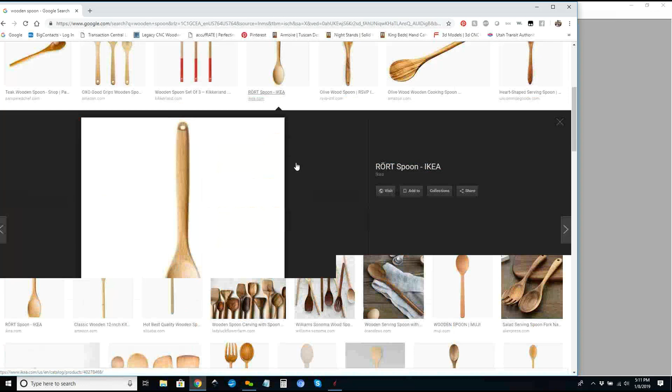Okay, I'm going to minimize this out of the way. So I've been asked to do some work with some spoons, and we are going to first pick the style of spoon we want. You can get on Etsy, Pinterest, Google, wherever, and really look up - there are a lot of different kinds of spoons. So it really depends upon what you're after and how we're going to create it. We're going to use this one from IKEA, just kind of a generic, nice-looking spoon. We're going to use that kind of as our guideline, but use that term pretty loosely, so we can play with it and decide what we want to change about it.

So we're going to open up our Aspire. This is the newest version, Aspire 9.5, and we'll create a new file. We're going to do a double-sided part. We're going to make our part about 18 inches long, about 2 inches in width, and then our Z we're going to just leave at 3/4.

The reason we're going to leave it at 3/4 is we want to keep it to where it's just a nice, even, easy to get material. Now you can make your spoons into ladles by making your Z thicker and doing the exact same thing we're going to do, just with a thicker piece of material.

Now, in the two-sided job setup, you have this zero position right here, and this is where you kind of have to decide what you want to do and what you're comfortable with. I'm going to leave both of my Z's on the top, so it's going to be material surface for both of them - on side 1 it'll be on top, and on side 2 it'll be on top. You can go machine bed, or you can also go on top with zero off the same side, which means on the top on the first side, bottom on the second. You can do that however you want.

For me, I'm going to do this where it's all off the top. Okay, and then our XY datum position, I prefer mine in the middle when I'm doing two-sided work, and you'll see why when we do our flip. Your flip direction, this is another personal preference thing. I like to flip my short edge, so in this case I'm going to flip it from bottom to top or top to bottom, versus from left to right - that's just because that's going to be the smaller edge to flip of the two pieces. Doesn't matter beyond that.

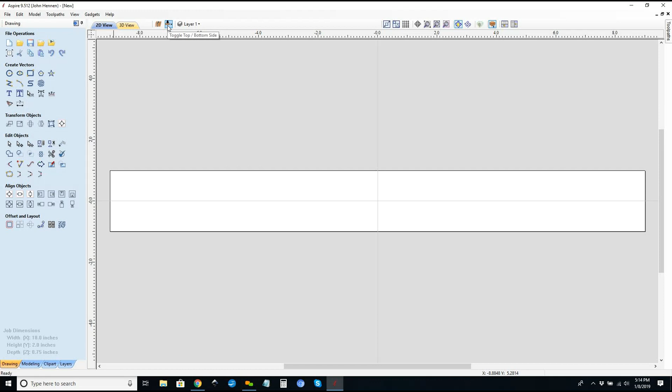Okay, so we're going to work on the top first, and we're going to leave this in our toggle view where we have our 2D up top and our 3D down at the bottom. That's because it's a really long, skinny piece - we can do that and still have a really nice design area.

So let's go ahead and leave it like that. Now you can draw this by the numbers, and that's what we're going to do tonight, or you can just lay it all out. So doing it by the numbers, I'm going to drag a guideline down on 0, and I'm going to bring this back to an even 7 inches here.

Then I grab my draw ellipse, and I'm just going to start an ellipse right here until it's about the size I want. And then I'm going to make this a little bit longer. I'm going to make this 2.5, and I'm going to make this one 1.5 and 1.5. There we go. That's going to be the size of the dish for my spoon.

Now, when you create these things, what we also need to think about a little bit is what is the backside and how thick the wall thickness of the spoon is going to be. So all that has to be thought of ahead of time when we're starting to build this.

So we know that this is 2 inches wide, and we have 1.5 inches here. So the thickest our wall thickness can be is 1/4, because that'll bring us right out to the edge of the material. Or we could shrink this in a little bit and make it maybe 1.25, and we can make it a little bit smaller.

So whatever you want to do with this, this really is where you start deciding and personalizing your spoon to make it however you want. So we'll leave it like this for now. So essentially it's 50% of the width equals the length.

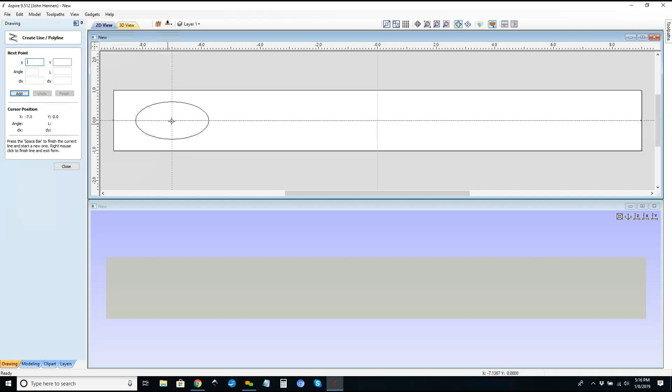Okay, so we're happy with that one, or at least we think we are for now. So we'll leave it like that. We're going to do our handle. So I'm going to just draw our polyline tool. I'm going to start right in the middle of the spoon. I'm going to bring this over and make it a 15-inch long spoon.

We're going to make it a relatively long spoon, and the reason I'm going to do that is because my wife and I do a lot of bottling. We love it, it's one of the funner things that we do together. And the hardest thing to find in stores is a really long-handled spoon. So we're going to make one.

And of course, you can make it whatever you want. You don't need necessarily to make it that long. But again, like Bob Ross always said, this is your happy little tree. We are making our happy little spoon. So do it however you want to.

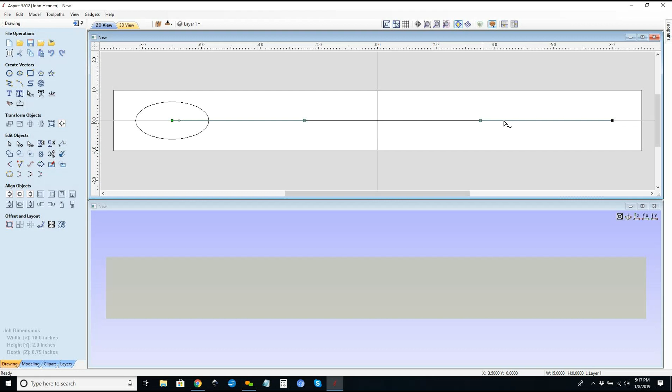We're going to select this center line here. We can go to our node mode. We're going to turn this into a Bezier, and we're going to start by just pulling this up. See, we're starting to create the shape of our handle here.

And I'm going to bring this point here right up to the top right there, and then I might pull it down and in. So we're going to kind of get a shape for a handle right there.

And we're going to take our ellipse, and we're going to do an offset on it because I do want to get an idea of where this handle should end, and it should end at the bottom side, not the top side of our piece. So I'm going to do an offset of about 1/8 of an inch. So our distance is going to go outwards 1/8 of an inch.

Okay, and I'm just going to grab this guy and move him up to the top of there. And then we're going to pull this back in so we have a nice kind of shape for our spoon. And this one I might use my arrow keys to bring it up a little bit more. It's totally up to you guys.

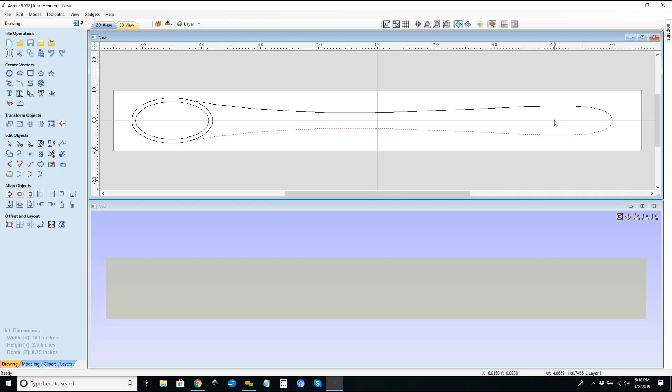Now, what we want to do when we look at this thing is we'll select our top vector. We're going to use our mirror objects. We're going to go to the bottom and just take a look at it and say, I kind of like it. I think that this is too wide. Okay, and I think that this is a little too wide. So Control Z to undo that.

Back to my node mode. I'm going to pull this one down into here, this area right there. Okay, maybe pull this back a little. And we'll bring this down just a little bit. And let's take a look at it again. Now, the other thing that we can do is if we like most of where we're at, we can insert another point right there.

And we can pull this one so it's a little bit more, that's a nice clean tangent line to it. So let's grab him. Let's do another bottom flip. You know, there's a spoon that I like a little bit better.

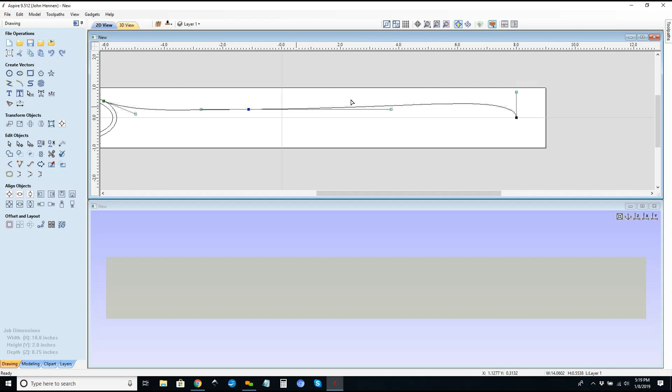I think this handle needs to shrink up just a little bit. So let's delete that, and we'll do this one more time. So to shrink it up, we're just going to grab this side, pull this over, and I might even drop this down one more time right there. Let's take a look at it one last time.

Again, this is your spoon. You're going to create this however you want to. But I think I'm pretty happy with the way that this is here. Maybe a little bit less on this area here. So we'll bring this down just a little bit more. In fact, we'll insert another point, and we'll just flatten that one out. Delete this, and take one more look at it here. There we go. Much happier with that shape.

So we're going to leave it like that. And that is a spoon. Class is over.

Really, that's the hard part, is just kind of getting the design right. Now it's the easy part, which is just creating your models and doing your work.

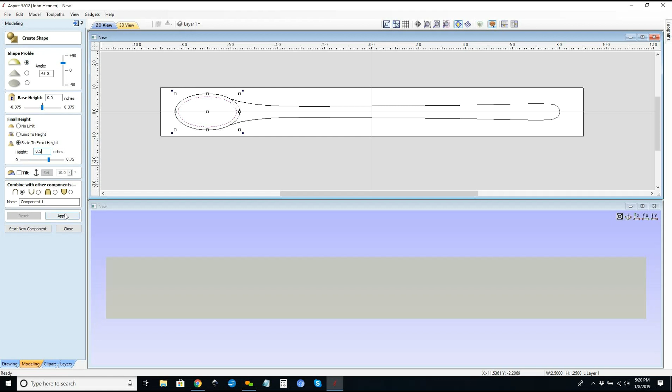So we're going to start by having the inner ellipse right there. We're going to go to our modeling, kick up here to our Create Shape from Vector Outlines, our Create Shape tool. And we are going to do a dome. We are going to scale it to a height, and I am going to scale this guy to 1/2 of an inch. Okay, we're going to go ahead and hit apply, and we're going to see it come into play right here. So there's going to be our spoon.

And then we're going to go to a subtract. We want that thing to go down into the material. It's going to look like that. Okay, close. For the back side of our spoon, we're going to do a little neat trick here.

We're going to grab this guy, so select our model. We're going to use the embossing tool, so that's going to be this create component by offsetting the visible model. Okay, we're going to offset the model, and we're going to do it a negative wall thickness. So I decided here when I offset this one, I was going to do 1/8 of an inch. So we're going to set it right there.

And we're going to preview that one, and it's going to take a minute to do that as it's bringing everything out. So we're in a dish, so a negative on a dish is actually going outwards. If it were a dome, an offset would be the other direction, it would be going in. But we want that dish and want it to offset outwards. So we're going to go ahead and let it offset out.

And I should have clipped the Z values. We may end up having to come back in and just clip that value real quick here. So when we're done with this preview, we always want to check that button that's going to clip it so that it doesn't go above the 0 plane, which is up on the top of the spoon at the moment. So when it's done thinking down here, we will go ahead and clip it.

Okay, so let's go ahead and do a clip preview, and then we'll be good to go. Then we'll go ahead and bring it on. Then we're going to flip it to the other side, put it on there, and you're going to see how the one is going to lay on the top of the other one, and we should have a nice clean piece in here, clean transition between the two pieces.

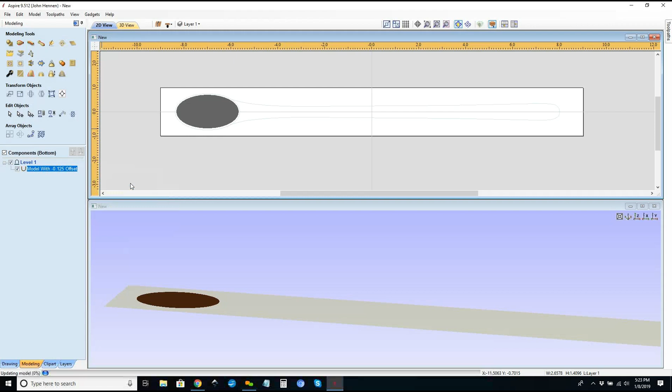Combine mode, let's do subtract on it. Here we go. And go back to our top and turn this beautiful bad boy back on. Wonder what's not doing here. This is what happens when you think you've got it nailed and you forget one quick thing. Let's do that one more time.

And turn off that clip. We can't clip the values because we're below 0, or we're clipping everything at the flat. Sorry about that. We need to just bring this thing in one more time without clipping the value to it. And then she should give us what we need.

Well, it's waiting. I just want to remind you to keep an eye on the screen. If somebody wants to be let into the room, you have to hit the allow button. Yeah, I've allowed, I think, 4 or 5 people now. Okay, good. So I think we've got them as they ping in. Oop, lost the glasses there. So.

It's almost here. Hey, while we're waiting, could you explain a little bit more about the offset model? Is that sort of like the vector offset, but applied to 3-dimensional models? That's exactly what it is. That's probably about the best explanation you can make on that, because it is exactly that.

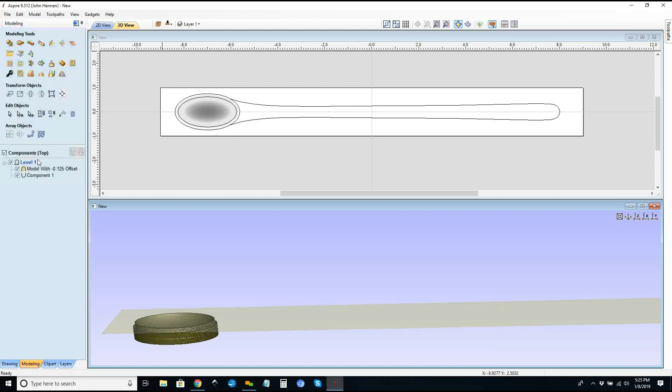So it's just going to be, here we go right there, and let's move this one to the bottom, to the other side. So it's like on a vector, when we do an offset, it goes out just horizontally, because of course it's a 2D part. And on this, it's going to go to a full 3D, so it's going to go up as well as out. So you're correct there.

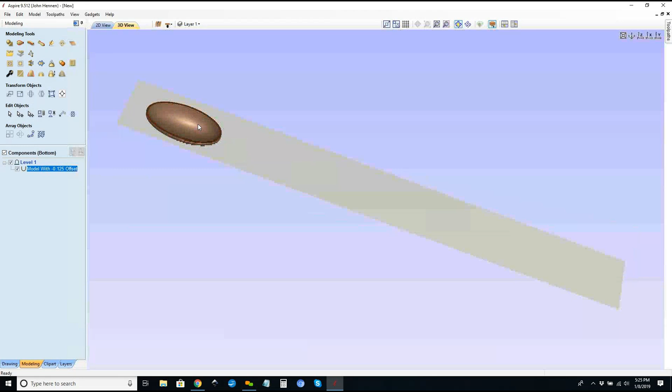There we go. Now that's what we're looking for. And see, now we have our spoon. All right, so let's maximize our 3D here. And so you can see down in here we have our dish, that's in our top side. And then on our back side, if we flip this thing over, we have a cup.

Hey, John, can you run through that one more time and show how you did that? Yeah, let's do it. We'll start from the very beginning. We'll delete this one. Okay, we'll flip over and we'll delete this one. Okay, so we're back to just strictly drawing.

We're going to select the inner piece here, so that's going to be the dish of our spoon. It's going to be the cutout, or essentially the ladle portion of our spoon. We're going to go to our shape profile. And it really doesn't matter a whole lot here because we're going to scale it to a height.

I'm going to scale it to a 1/2 inch. We have a 3/4 inch material. I could actually scale it to 5/8 and still be okay because we're going to keep that excess material. We're going to do a wall that's going to be 1/8 of an inch thick, but we're going to leave it at a 1/2 inch. And we're going to set it to a subtract, and we're going to hit apply.

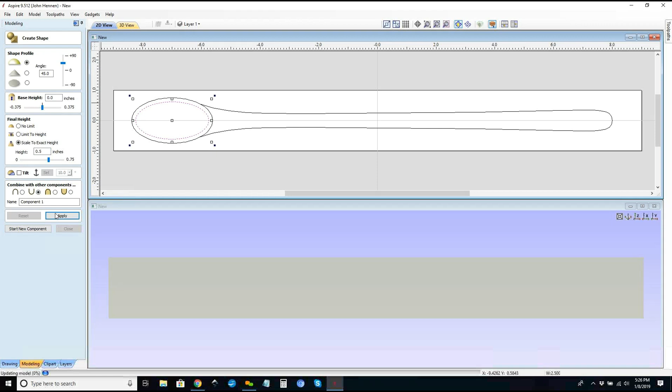And so that should give us a really nice spoon here, okay, or at least a little dip for a spoon. And we're going to close that one. We're going to then select our dish shape, and we can, if we want to, add a zero plane. You can see the dish a little bit better, you can see how it's coming out as a dish.

Okay, we want to turn that off when we do our emboss because it'll actually do that on the entire surface, we don't want that. So we're going to go back in here to our offsetting tool, and we're going to set our offset distance to a negative because we're going down. Negative makes it larger, so we want to go negative. Do not clip the Z values—only clip the Z values if you're going up, but we don't want to clip them right now. So we're going to go to our preview here, and it will go back through this one more time.

So while that's happening, just because it's boring to watch it do this for the second time, we're going to kick over here and we'll show you here. Always got to remember to do that.

I'll go here to Aspire 9.5. And let's put that in there. Let's allow her in.

Okay, it should be about done now. All right, it's almost done. So while it's continuing to think, we'll bring in this other piece here.

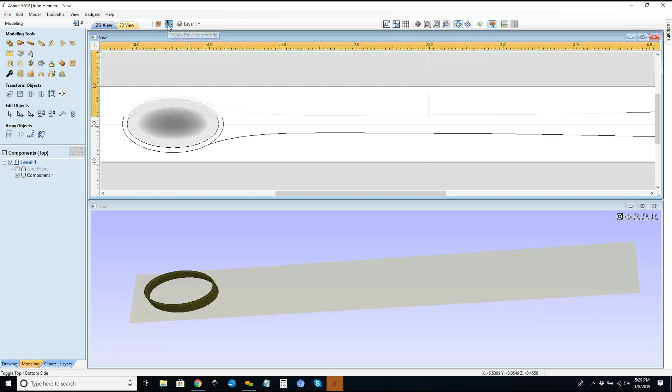When you click that little button there, it's going to flip us over. We're going to take this guy and go to combine mode of subtract, so it's going to invert what we've already done. Subtracting a subtraction, like a negative times a negative equals a positive—same idea. We had a dish that we then inverted, which makes it a positive. So by doing a subtract on that, we get a positive.

And there's our shape. Let's go back up to our top side, turn back on our zero plane, and that should help you see this just a little bit better. There is our piece. So there's essentially our spoon to this point right in there, and the back side of our spoon is right in there. We'll go ahead and turn that back off.

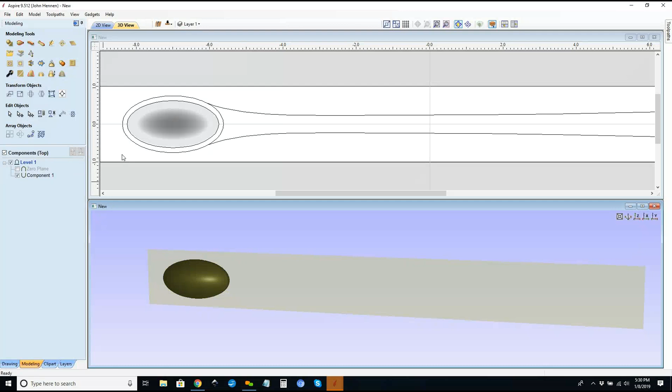Let's go to work on the handle. Now the handle is a little bit tricky, and this totally depends upon how you build it and what you want to do with it. Again, every spoon is your happy little spoon—you got to build this however you want to. There are easy ways, and then there are not easy ways to build it. It's totally up to you.

This one is set up right now for a 2-rail sweep. So essentially, we have this bottom rail right here, this top rail right here, and then we can sweep across the shape. As we do that, we can decide what we want to do with the shape of the entire piece. We can 2-rail sweep it this direction, doing some cross sections, which will give us a shape to the spoon if we so desire. We can also make it one large 2-rail sweep by drawing a vertical line here and here, sweeping it vertically, and then cutting out the shape. It's totally up to us.

So the first thing we want to do is get a cross-section idea of what we want the handle to look like. Lots of prep work when you're doing something like this. We're going to start by just drawing a square, move it up here out of the way, and we want it to only be 3/4 of an inch in Y, because that's essentially the side view of the handle. I did tie it to our end point here and to our beginning point there. So now we can come in and get a side view of what we want the handle to look like.

So we can come in and go back to our Bezier, and maybe I want my handle to kind of swoop in, swoop down, something like this, matching the shape. The underneath of that would simply be taking this thing and doing an offset—in this case I started here, so we're going with an offset left, maybe 1/4 of an inch. So maybe we want our handle to look like this—doesn't matter, kind of whatever we decide we want it to do, we can create that shape. This is just getting an idea of what we want our cross section to look like and what we want to do with it.

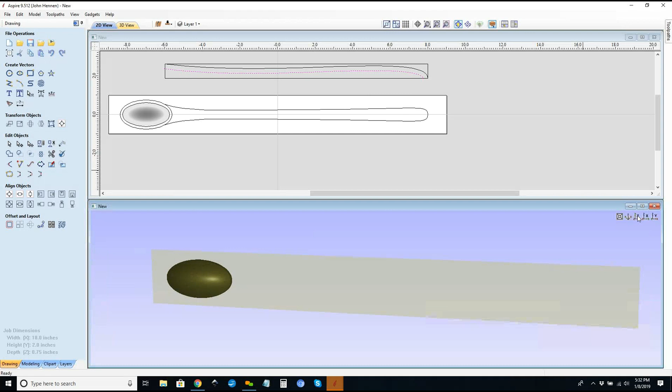Yeah, maybe blend it towards the spoon side. Okay, so we'll blend it towards...

Do you have any preferences or experience on how thick the handle should be so they don't break? It depends upon what you're doing. If I'm canning, and this is a canning spoon like I told you it would be for my wife, this whole thing's going to be round, because the round is going to give me some thickness and strength behind it. If this were more like a serving spoon, one that has this kind of shape, then I would stay at least 1/4 of an inch. And you want to make sure you're using quarter sawn material because it will give you a lot more strength than regular flat material, even with your grain. So it's really up to you guys on what you would prefer.

Hey John, this is Jim Senecola. I was reading on spoon making, when you carve them by hand, if you make one side, say from the top down, narrow, you have to compensate in the width so that you get the strength.

Strength, yep. So if you make one side thin, you've got to make the other profile thicker. We can definitely do that. That's what we're talking about here — it needs to be wider here if we're going to be thinner on this. Is that what you're talking about, Jim?

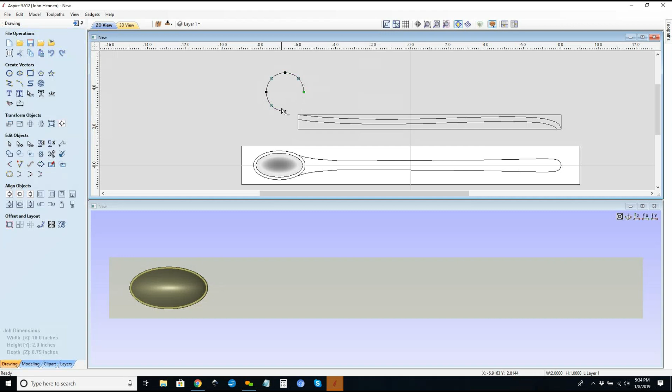Or of course we can always sweep it as a circle. If we're going to sweep it as a circle, we're going to take these two and just do a quick two-rail sweep, which is really quick and easy. So maybe we'll play with it both directions and let you guys decide what you prefer.

And so we will do that. And you can hear my kids in the background — give me one quick second while I fix that. I can mute my...

Does your circle have to be the width that you want it, or will it only sweep between the rails? It's a fantastic question. It depends upon what you do right inside your two-rail sweep. In the two-rail sweep button, you have the option of scaling — sweep between and scale cross-section with width.

So it doesn't matter how big it is. If it's a half circle, it's a half circle. You can send this thing all the way through and you're going to get something that looks like that — just sweep the whole thing. It doesn't matter how big it is because it's going to scale the cross-section, scaling the Z with the width as well. So it just runs down there, and as big or as small as it's going to be, that's all going to run together. You can do it exactly like that if you want to.

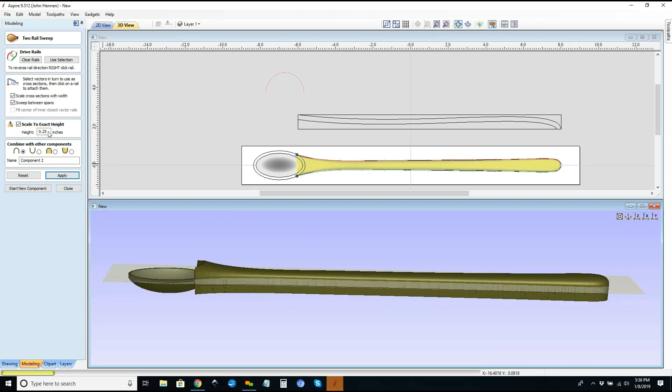Now of course we need to bring our spoon up and do some other things to it, but that's assuming we actually want to do that. We can also scale it to an exact height and put in a number — probably not 1/4 of an inch, but you can do that as well, where no matter what it is, it never goes taller than 1/4 of an inch, and it will then squirt across the front of there as well. Totally doesn't matter — again, it's up to you.

So let us just ditch this handle. This is one handle — it's definitely a doable handle, pretty straightforward. All we're going to do with it is push it down 1/4 of an inch by going to our monkey wrench and saying our base height is at negative 1/4 of an inch. And we're going to put it on a merge, and then we'll hit apply.

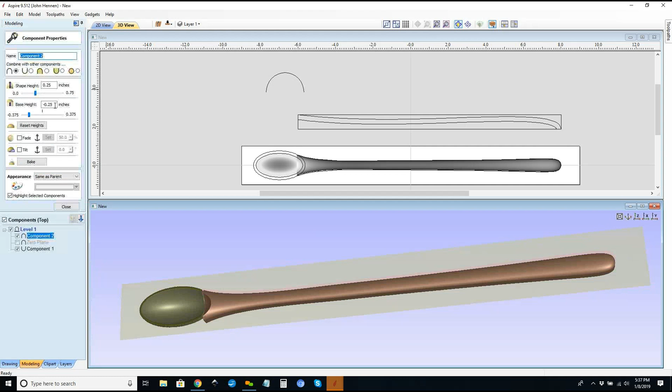Maybe not quite. Let's leave that thing on a merge, and allow it to join. Let's take a peek at it from the side view here and see what we can do with it. Let's go to this view.

Let's set our base height. It should be there, right at the top of our spoon. Maybe we're just a little bit too low there, and we want to be on a merge, not an add. That's what's going on. There we go, so that'd be that.

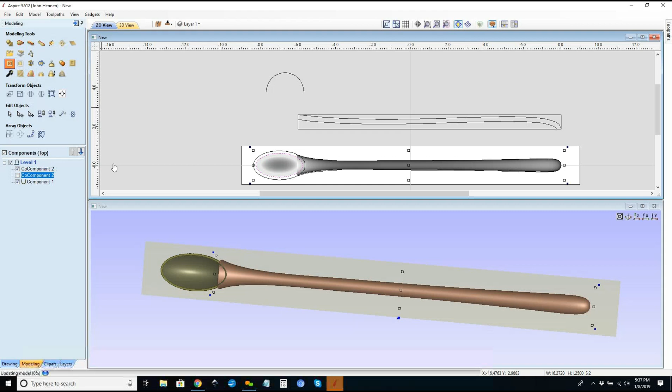Then we would need to trim off that center section right there, so we'd select this guy and that guy, deleting our inside, which would get rid of that little portion. So this would be one way to start our spoon, and as we build up the rest of it, we can tweak it.

So here's one option. Let's turn it off for now, and let's do the other option, which is doing a two-rail the other direction and then cutting out the shape of our handle here.

To do our two-rail the other direction, we're going to start right here. We're going to make sure our rail is a linear distance, same as before, so we'll go 2 inches. We'll center that, copy and paste it, and drag it down and snap it right there.

Now what we have right here should be our rail, this guy right here. What we need is just to add a single line to it, which goes from here to there. We'll grab those and move them down and out of the way, join them together, and do our two-rail sweep here.

Now again, we want to have it sweep all the way at the end of here, and then we're going to end up trimming that away, just like we had a minute ago. We have to trim that away in order to give our spoon that shape there. So use our selection here, put it right there.

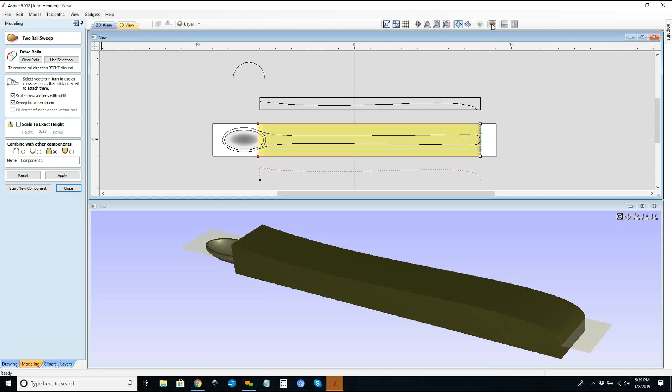We're going to hit apply. Now it's going to be 3/4 of an inch taller because again we did that negative where we dropped everything down, and that's okay. There's our sweep right there, that's our full 3/4 of an inch. Let's do something else to make it easier for you guys to see that.

So that right there is actually the bottom of our material, but we're working on both sides. We're going to turn off the one side here real quick and toggle between the two views. There we go.

All right, we'll take it, and we are going to push it down 3/4 of an inch. We're going to make this an even 3/4, and we are going to take our base height to negative 3/4. That's going to push it down inside of our model right where it belongs.

That's beautiful. Okay, and then you can see again we need to clean out this area here, clean everything out inside of it. So there's our handle there.

And the last clean real quickly would be to take this. We're going to join them, first by moving endpoints, and then by a line.

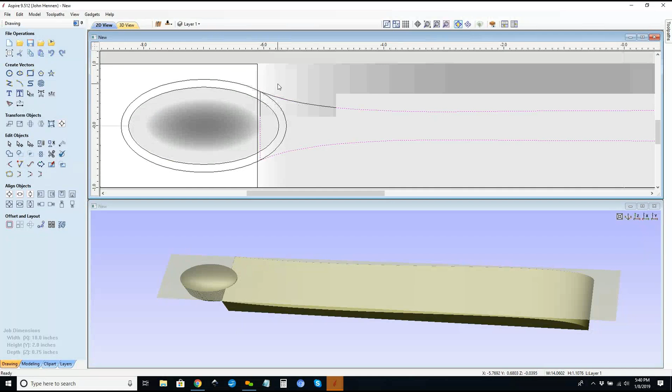We're going to take and look at that. We want those to... let's not do that. Let's move this one back. Notice how that line is a little bit longer, and that is right there.

Let's do that sweep one more time so they're in line, and then we'll cut that out. So spend a little bit of time to do this now and get you a perfect spoon versus doing it later. Merge and apply.

We want those tips to match up, and our line wasn't right quite where it belonged.

Okay, back to our monkey wrench. We'll grab this guy, 75. Okay, negative 75.

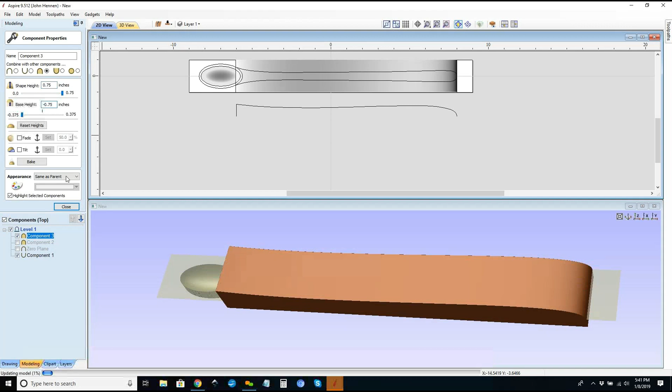Okay, we're going to do this trim right here first, which is trim everything on the outside. Should cut away everything but that. There's our handle. And then secondly, we want to do this guy and this one and trim inside of it to cut that away.

Okay, let's take a look at it from the underneath side. What we've got here, we're going to kick this onto here. And see, we're getting close to our spoon here, but now we need to build our backside.

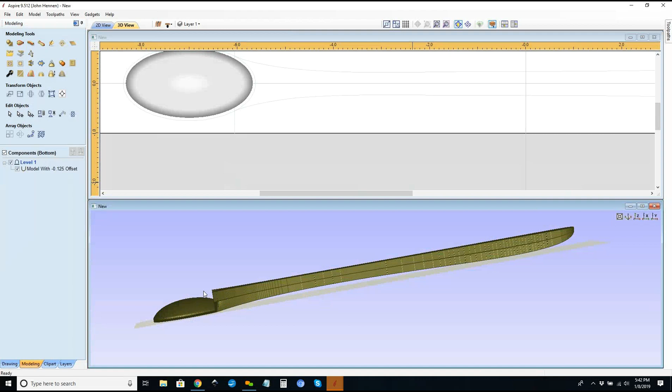We want this to kind of blend into our spoon itself. So these same vectors, this same cutout here, will be used again on the backside. But now we're going to sweep it the other direction. And then we're going to decide what we want to do with that. So let's go ahead and lay out that.

Back to our top side real quick. We're going to grab our second guy here, we're going to grab this one here, and we're just going to do a copy to the other side. And we'll grab these two lines, and we will do the same, copy to the other side.

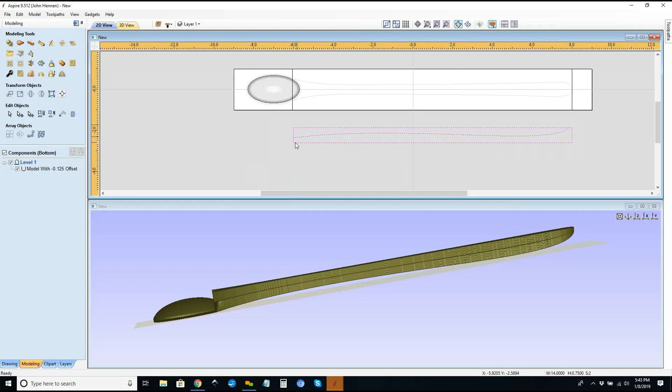Okay, let's go to the other side and take a look at it. Now this is the shape that we want here. So we're going to bring that up there. You can see that it should just sweep right into the piece.

Let's use our scissors tool to quickly build this guy's cross section here. So it should be that. We'll grab our node mode, delete this bottom portion here, and then that sweep should now come across there.

Let's take a look at this. Now we go to our node mode, you notice that's our start point. And so that's going to be important in the selection of our two rails to sweep. We're going to select this one first, this one second. Notice that's the red.

Let's go ahead and hit apply to it, and let's see what it does to us here. Okay, now we have got the shape here that should fit our spoon, except for we've got this thing.

Let's reset that, let's clear our selection and flip it to the other side. So we're going to use this guy first, this one second, use selection.

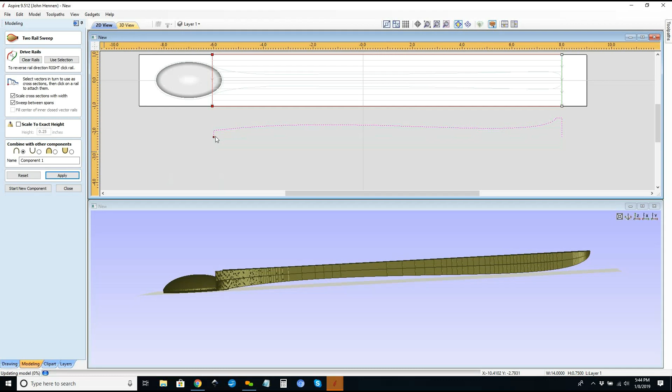Apply. So those red dots need to be all on the same ones. Give us kind of the shape that we're going for. And now there's this one here. We're going to go ahead and just leave it right the way it is for a moment.

And we'll take a look at our handle, and you can see here that we need to blend it in a little bit more. So we'll set it to a merge. It should lay down on top of it, just like so.

And we need to go back to our top real quick, because we need to get this down and this one down. So we'll do copy those to the other side as well. So you can start to see kind of the shape of our handle as it blends through everything here.

Okay, with those on the other side, we're going to do the same kind of thing here. We're going to cut everything away. Should give us that. That should start to give us our spoon.

Okay, we got some smoothing we definitely need to do there. So that should give us the shape of what we're looking for here.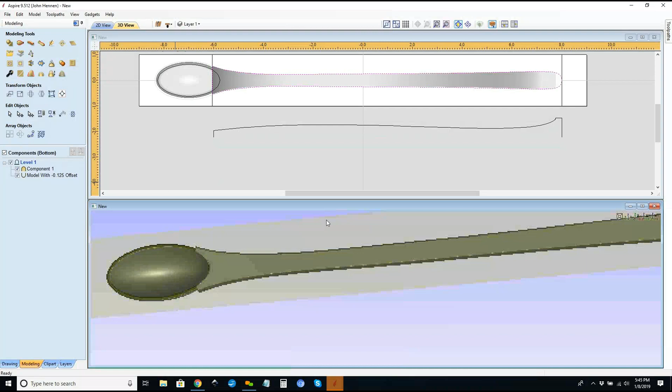Now on the top side of this, we do want to add a zero plane. And so we have to flip this back over and then add a zero plane to it. So here is our zero. What that'll do is give us the cutout area of our piece, make sure that we have a nice clean transition between our tops and our flats and everything else.

So here is this. Let's go ahead and take a look at what would happen if we put a toolpath on this. We're going to take these two right here, go to our node mode real quick. I'm going to get rid of that line there. And then we're going to get our scissors and trim away that section. So this should be now the outline of our spoon, just like so.

Let's see, we want this back on for just a moment, and we're going to put a circle or a drilling pin right at 8 1/2. Let's go 8 3/4, that'll be right there. We're just going to put a 1/4 inch diameter hole right there.

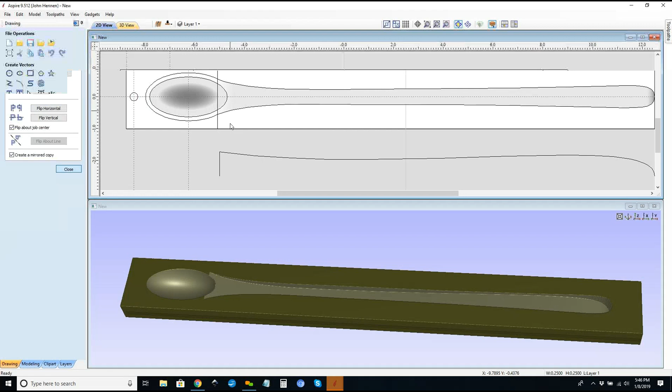And we're going to have it mirrored across horizontally to the other side. And that's going to be important because that's how we're going to be able to flip our part and make sure that everything flips and works out.

So let's throw some toolpaths on it real quickly. Roughing passes, I probably won't use a roughing pass for this. That's a totally your call thing. You can do a roughing pass if you like roughing passes. The tapered ball nose cutters do a fantastic job, and so I usually don't use a roughing pass.

Now, let's show you this. This has a small teeny weeny error where it says it's 3/1000 of an inch too thick. So we need to go back to, I believe, our bottom side for that.

So let's close out of this one. Let's flip to our bottom side. We need to take a look at this shape right here and see what it is giving us for its height. Right there. So let's give that one an even 3/4 of an inch.

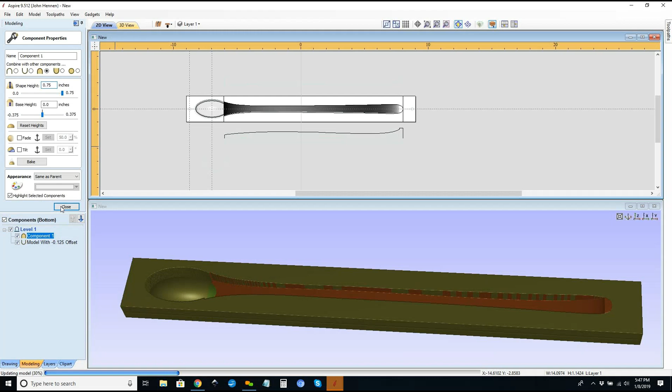All right, and that should allow us now to work. So let's flip back to our top side. Top side first, we're just going to go right to a finishing. We're going to use our vector on this one because it's not got a lot of detail to it. We are going to do the 1/8 of an inch tapered ball end mill.

So we'll go ahead and grab that one. The tapered ball nose that I use has a 1.5 degree side angle to it, so it's going to come out just a little bit. It's a great cutter. We're going to raster with the grain of the material, it means less sanding, and let's calculate this.

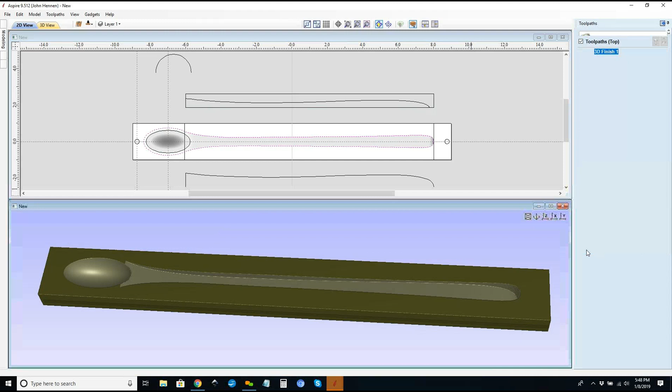Let's preview our visible toolpath and take a look at our spoon. Well, notice right here that I probably do want to smooth that little section out. You can see this right here. So that model is just barely above there. So we are going to go ahead and clean that up real quick.

What I want to do is I want to turn off our zero plane. We're going to insert a new level, and we're going to use this tool right here. This is a fantastic tool, it's create a component from a visible model. And what that does, it allows me to keep my two original pieces, and we'll turn those off. And then we're going to take our spoon and we're going to work on just our spoon here.

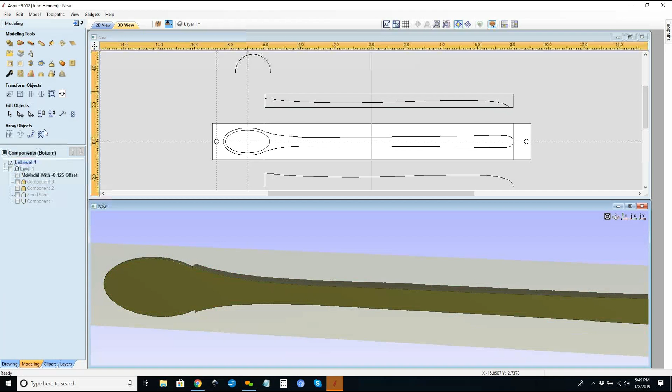And I guess I better delete that and turn off all of my backside models real quick. So let me just turn off my underside and turn back on our side here. And let's do that again. Create component from the visible model.

All right, I'll turn that one off. So we just have our original piece here. And we're going to go into our sculpting tool. And what we're going to look for here is we're just going to kind of smooth out that little area. So our Alt is going to allow us to do our twiddle view where we can zoom in, zoom out, and kind of play with everything.

So we're going to be right up on this guy here, and we're going to go to our smoothing, and I'm going to go to lower. And we're just going to bring that away. Let's bring our strength up a little bit, and let's just get rid of that. Just going to take a little bit of time, just clean him up. And there we're starting to get, there we go.

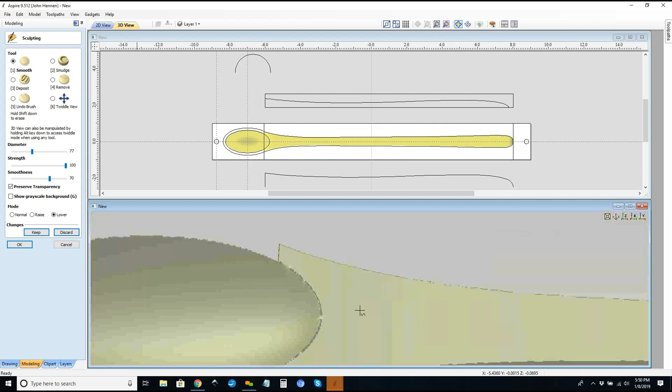And we're having a little bit of holes right there. So what that means is that our model is right on top of the other model, so we're getting a little bit of a hole right there. So we're going to come in, and I think the easiest, cleanest way to fix that might be adjusting the shape of this to come out and then down. So let's see what happens if we do that real quick.

Okay, and what we'll do is we're going to take this, put it over node mode, and I'm going to insert another point, probably about right there, and one more right here. We'll make this a line. I'm going to snap this one using our guidelines to about right there. And that should make sure that we have a nice flat up there on the top before we get into that shape. So we'll just take this one real quickly.

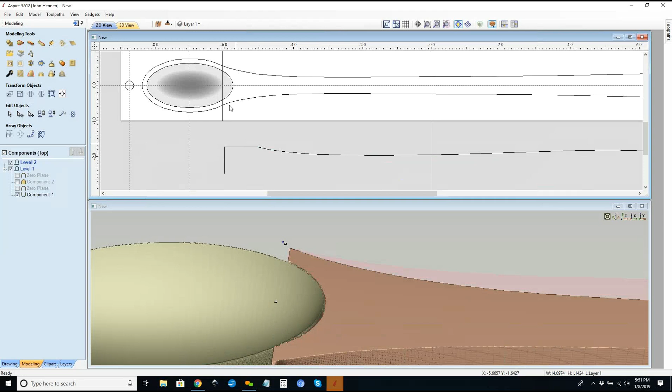We're just going to tweak the design slightly just to make it a little bit cleaner and easier to use. Now, of course, that's about 15 thousandths is all it was. So technically, we probably could have just machined it and then sanded that a little bit off, and nobody would have known better, but we'd have known. So sometimes it's funner just to fix it like this, and it gives less work later. So we can see how we're well inside that flat now.

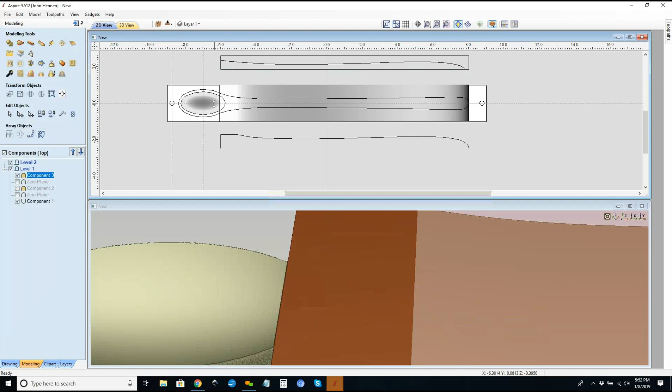Beautiful. All right, and we'll cut it out again. So we're taking this one, and we are going to take our inside right there and trim it away. Oh, snap. And if you accidentally use the scissors tool, just delete that inner portion. So that one can go. There we go.

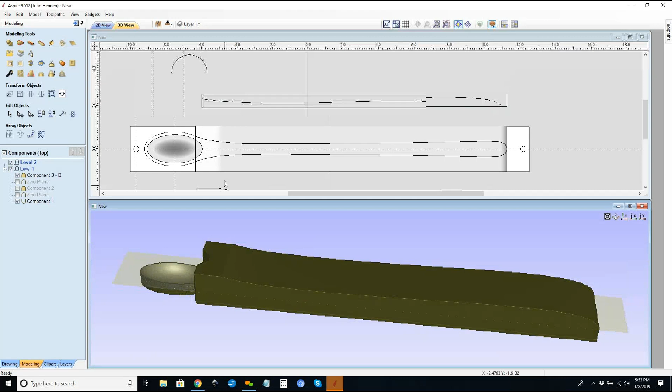Why is it still high? That's a good question. Let's take a look at our view here real quick. She's still a little on the high side. Interesting. Not sure why that is. We're going to know in just a minute here. Let's delete everything outside of it.

Bam, that goes down below our 0 plane there. And this component, back to our monkey wrench, we need to give it back down to the -3/4. All right, so there we go. Spoon tweaked.

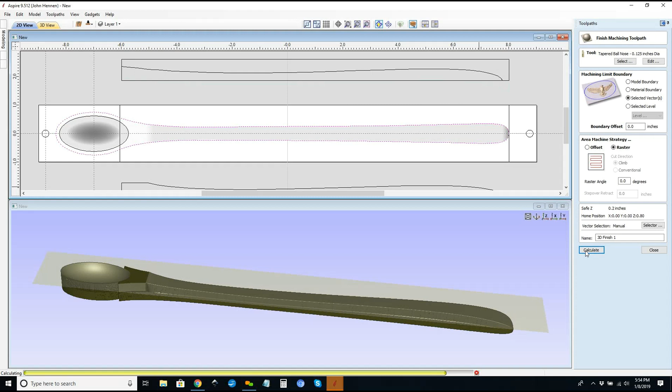Back to this, let's remachine it. And let's see, we get out of her this time. Reset our preview, our visible toolpath. There is our spoon. All right, so now we have a nice clean top on our spoon.

Let's flip it over to the bottom. Actually, let's stay on the top for just a minute. Let's copy this to the bottom. Then let's go to the bottom and let's just throw our toolpath on it real quick, just because it'll be fun. Take a look at it here. Same thing, no roughing, just straight to finish. Let's calculate it.

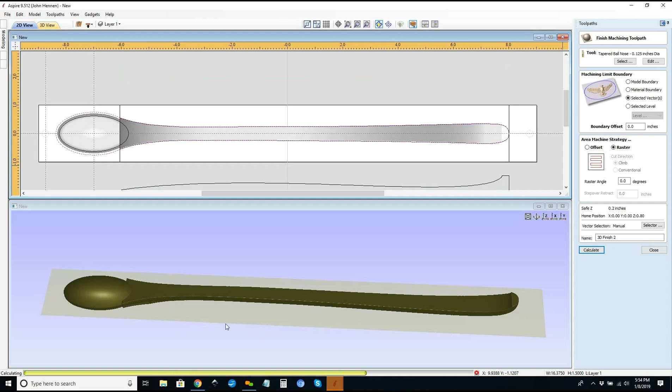We definitely need to smooth those out right there. And those definitely need to blend. So now these two pieces right here definitely need to blend into each other. It's a little bit more, but let's just take a look at it here. So there is our spoon.

Okay, and let's just throw a cutout on it so we can take a look at it, and then we'll go back in and we'll tweak everything else out to make it perfect. So let's go ahead and just calculate that. No tabs yet. We're going to put tabs in this. We definitely want to put tabs in this, but this will just give us the shape of our spoon.

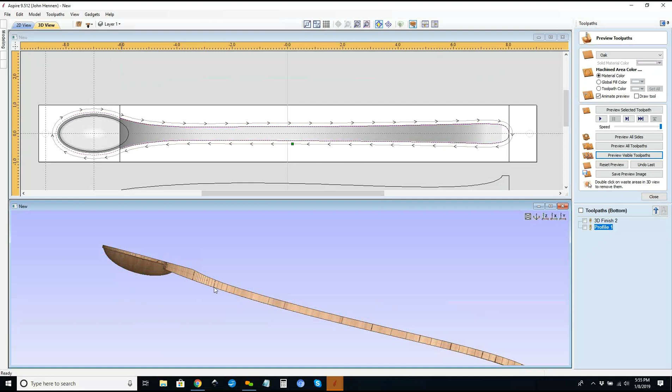So here's our spoon with a little bit of cleanup we need to do. We need to clean up this one, which means we actually want to extend that out a little bit more so that we can blend that one into it, so that we get a cleaner finish on that one. Then I think I want to go into the sculpting and just kind of smooth off the sharp edge everywhere. But that is going to be our spoon.

So let's go ahead and do a little bit of the leftover cleanup work, and then I think we're good to go. All right, let's come over here. Now this is as much cleanup as you want it to be, and as little as you want it to be. This is your spoon. You build it however you want to. That's 110% up to you.

So we're going to go to our Insert New Level. We are going to create a component, and we'll turn off this one. Let's go to our Sculpting tab. And what we want to do is make this—sculpting is like sanding, but without all the hard work.

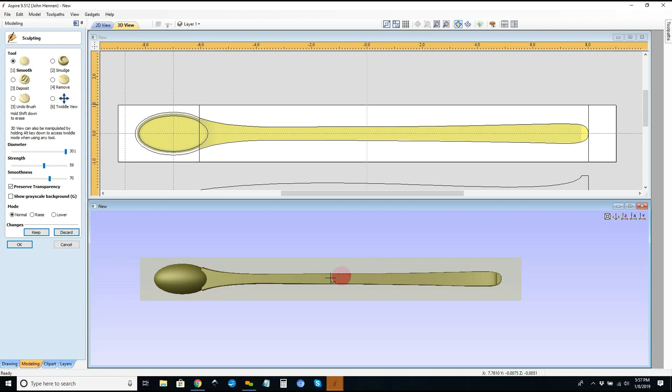So we're just going to come over here, just going to break those edges off. We're going to just bring that one down in. See, we're seeing how that works there. And we may add another model to it, just another shape. We just sweep that in, and I think we will. But on the rest of it, let's just use our Alt here. I'm going to zoom out here, make our sanding pad nice and big. And we're just going to ride that right down. All that we're trying to do is just get the edge off of the piece. That way, when it 3D carves it, you might as well 3D carve the radius edge into it.

Okay, let's go in and take a look. So we're looking nice. Let's drop this a little bit more here. We'll bring our strength up a little. There we go.

All right, one of the things that I learned about the sculpting tool is that the smoothing tool especially has a point at which it will not smooth anymore when you're doing a straight up and down line. So we're pulling our strength up to 98%, and I'm going to pull quite a bit of smooth out of it.

But there'll be a point at which you can't pull anymore, and that's about where we want to be. So we just want a nice clean edge in front of it. And you can spend as much time as you want.

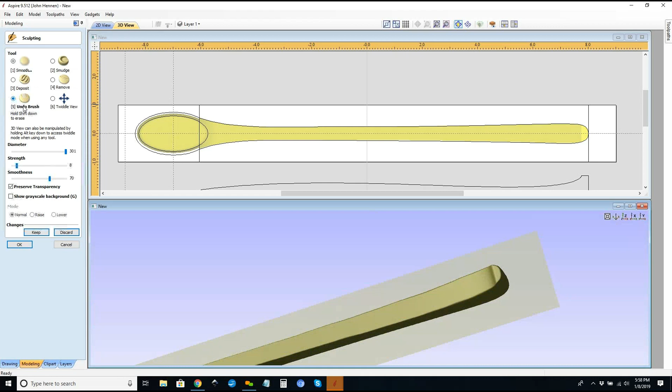Now, if you're afraid of the smoothing tool, don't be. Or if you're afraid of sculpting, don't be. They have this wonderful thing in here called the undo brush. Undo is our best friend, because if we decide we don't want it, we just go to undo, and we undo everything. We can go right back to cleaning everything completely back to the sharp edges that we once had. You can see that right there. So see that? So don't worry about the undo, or don't worry about screwing anything up.

Even if you're trying to do something crazy like do that, you can still come back and just use the undo brush to clean it up. Okay, so it's really quick, really easy. So if you screw up, it isn't a big deal.

The only thing that you cannot undo is if you do the erase tool. If you hold down Shift, you can actually erase part of it, and that does not undo. So you don't want to, when you're using the erase tool, you just want to be darn sure of exactly what you want to do.

So, and if you do use the erase tool and you screw up, so say we're down here, for instance, and we just want to kind of clean up this, right? And so I say, you know what, if I get in here with the undo brush and I switch it to the erase tool by holding down the Shift button, maybe I just want to clean off that edge a little bit, something like that.

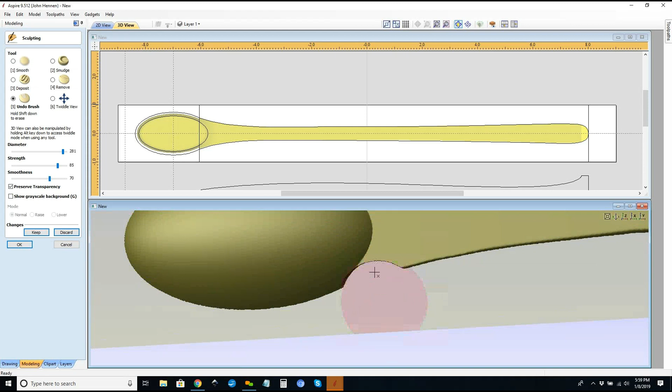Now, technically, we could probably get away with this. But let's say we get a little overzealous, okay, and we accidentally do something like this. Okay, we just screwed up our whole spoon, right? Just hit cancel, and then it comes back. So don't stress, nothing is permanent until you save your file.

Once you hit the save file, save, and close it, and then reopen it, then it's permanent. Until then, nothing is permanent, so don't stress anything. It's all like a party.

So, all right, does that make sense to everybody? Hopefully. Yep. Thanks. No problem. It's always stressful the first time you do it, and there's no need to be stressful.

So we're going outwards on this one. We're going out that 1/8 of an inch. So for that line there, we're just going to blend that thing back in.

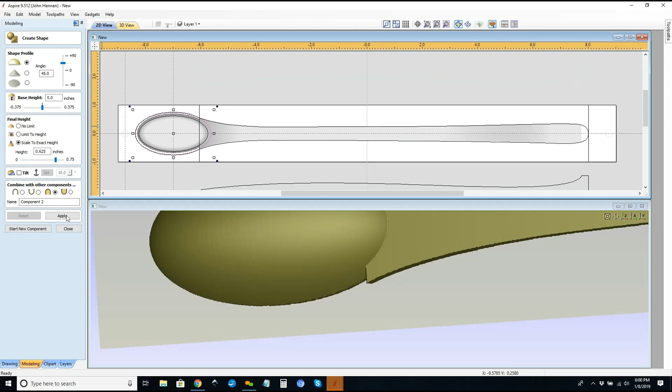So what we want to do on this one is I'm just going to take this guy and I am going to do modeling a dome. We're going to come up and we are going to scale to 1/8 of an inch more than that, 5/8 of an inch on a merge. And we'll hit apply. What that should do is I should blend this one into it.

Just like that, but we're not quite getting what I want in there. Yeah, I think on your first 1/8 of an inch, you got 1125 instead of 125. Oh, that will do it. I appreciate that. That is a common mistake in this guy's life.

So let us reset that. We don't want that. Okay, there we go. Let's see how tall we are right here. So right here, we can see right here, right down here is our X, Y, and our Z. I want to blend that into this. And so if we look at this, we can see that our Z is going up and down right there.

So this is at a negative 5,625. So I think what we'll do is we'll do this one, and 5,625 should give me a leftover of 0.3125 on a merge. And that might give me what I want around that. And it kind of does. I just want to blend that into it.

So I think we'll go a little bit shallower here. And this is where it's like a party. You just got to play with it until you get what you like or don't get what you don't like.

I want to kind of blend that in and then just trim this away as it goes up. And I'm not quite happy with that, but I think if I bring my line in here, see I'm getting the cutoff right at this crescent or this point right here. So if I bring this in, I'm just going to extend this around and in, and I think we can use that.

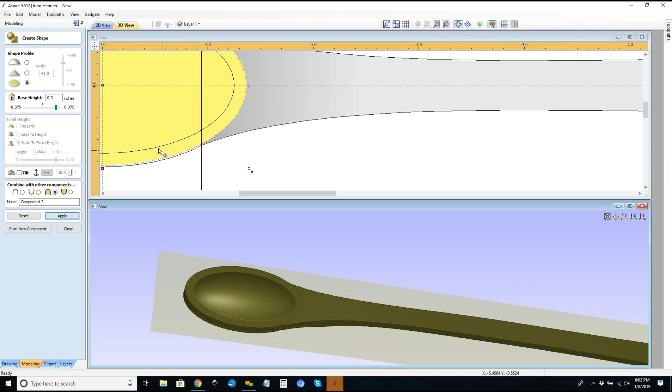We're going to stick with that one for just a moment, and then we'll take this guy. We're going to use our trimming tool, and I did a 1125, that's why it's a little bit smaller. I guess that would be all right. And we'll take this one, join it with a curve, then use it plus that one to delete everything outside of it.

That should help me blend that piece in. Oh gosh, don't delete everything inside of it. Let's try that again. If you want this one and this one to delete everything outside of it. There we go.

All right, so that should give us a little bigger blend in there, and I still don't like that very much. I'm trying to get a better transition here. It's a little better, but I'm just not quite happy with the way it looks. So let's see what we can build into that.

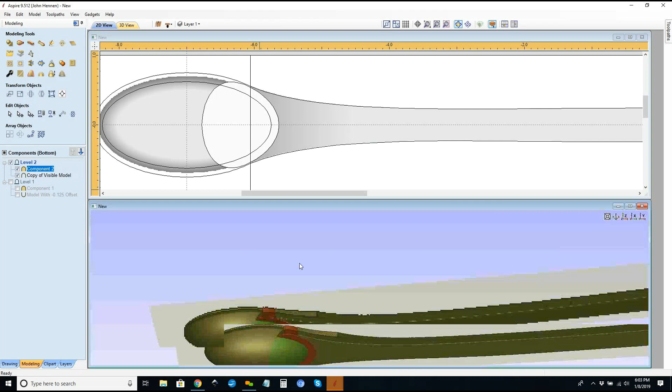I guess if we took... thoughts, what should we do? You see what we're trying to get rid of? We're trying to get rid of that edge right there. And so we blended this piece into it, so we get a little cleaner shape. We look at this.

But I just don't like the way that it transitions to that point. So I kind of want to radius that out a little bit more. I'm just debating on what would be the best way to handle that. If you guys have thoughts on that, let me know. We're going to try a couple different options on that.

I have a question. Is it if you did the two rail sweep all the way around the front of the spoon? Does that cause problems? I'm just trying to figure out why the transition line exists.

Oh, that transition. Oh, so you mean what if I just swept the whole thing? Yeah. I like your style, but shall we give it a shot? Sure, I have no problem giving that a shot. Let's do it. Let's turn this back off.

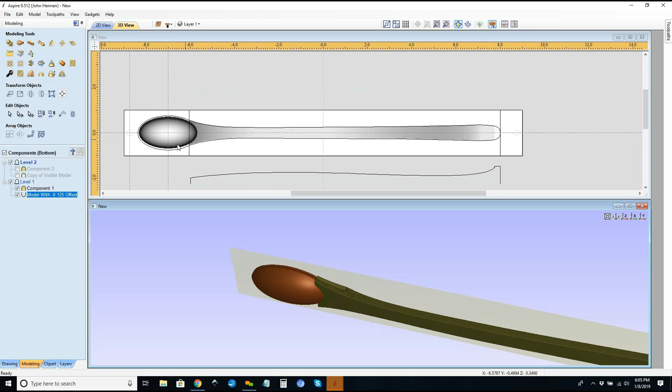So we're back to where we were. Here we are with our two different pieces. So our two rail sweep, if we swept that handle, let's think here. Oh shoot, I think you've just solved the universe. Let's give it a shot. I think I have an idea about what we're doing here.

So let's cut this right here. Let's cut this right here. And let's do this guy. I just want these two. Modeling, 2 rail sweep, use selection, go in that direction, go in this way, scale to a height of, merge, and apply. Let's see what happens here.

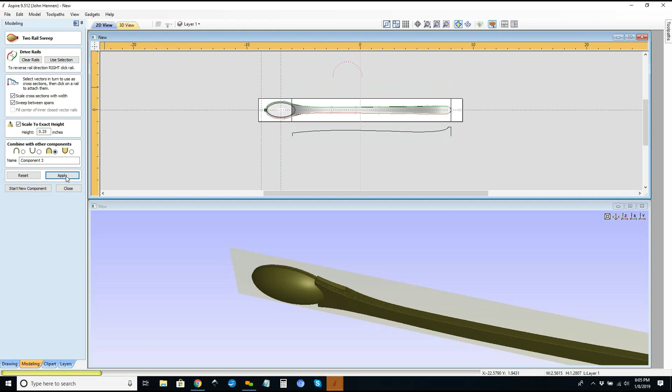What does the inside look like? Inside looks freaking sweet. All right, let's turn off that other part of the handle and let's just see what she does. So we're going to turn off, let's put this down here, and we're going to turn off this portion of the handle.

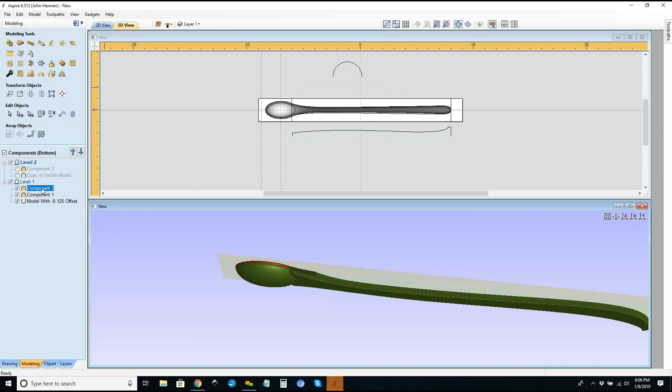Well, shoot, maybe not quite. Let's see what would happen if we left them both together. And see if we can... well, that just gives us a radius on the bottom of it, but not enough to do what we want it to do. Well, snap. Kind of. Or really not quite.

All right, the heck with it. We're just going to go in and do some surgery on it. Okay, surgery it is. So what we're going to do is blend this in. We're just going to cut that away right there and then smooth it out. So it would have been fantastic how that worked, though. That was a great idea.

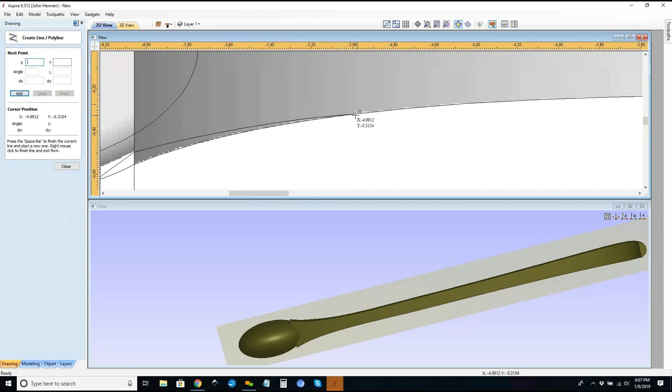So when you're trimming out a vector, we want to always start outside the line. We're going to go into here, and we're just going to blend it down to about right there. We're going to our node mode, Bezier, and we're just going to pull these ones up like this. And let's bring this one down to there. Now on the other end of the trim, we cannot let it join with everything else. It has to be out there. Okay, let's see what happens with this.

Okay, that will do that. Let's flip this to the other side. Vertical phase. There we are. Let's do that one more time.

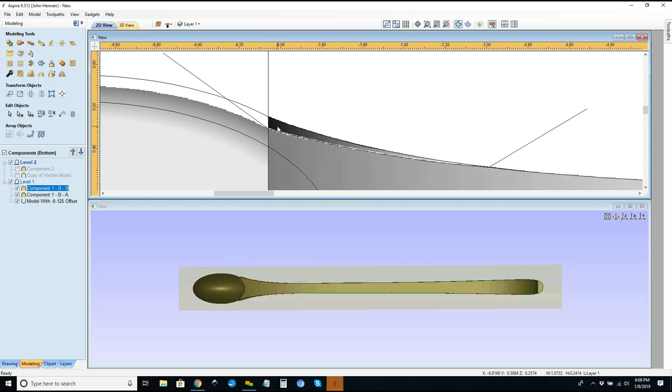And that should give us what we're looking for. We want this vector here. All right, let me get rid of these ones because I mirrored it the wrong direction. Let's take those two, get rid of this guy here, this guy here, turn this one back on, view, create component, turn this one off.

All right, now we should be able to smooth that out and give us a nice clean transition. So let's do that in our sculpting now that we've cut off that edge.

All right, now that we have something underneath all of it, right there, we can spend the time on that portion right there. So now we're going to come in here, we're going to go to a lower, bring our diameter down, way down, down around there, and let's work that into our part a little bit better.

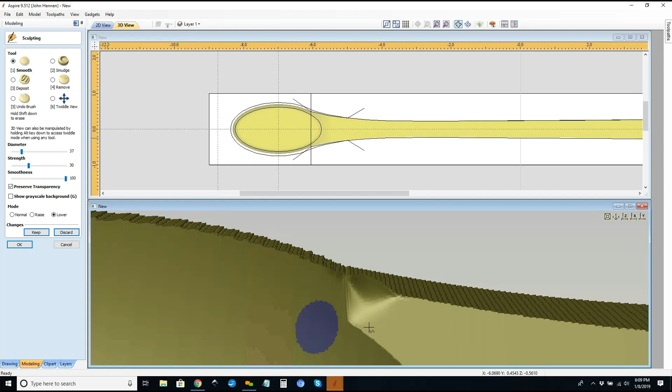And then we'll go to a normal, and let's just change the transition of the part here. Let's bump out just a little bit and see what we can do here. Bring our strength up on it. There we go. And that is what we're looking for.

All right, and we're back over to this side here. Do this right here. Smooth that out of it. And we'll work down our part now. So we're just kind of blending that in together. So that's more what we're looking for.

All right. Now we can come into the bigger area with our bigger side here. And then we'll just do a little bit of this electronic sanding on the edge. And I think we're good here. And we'll do that top edge as well.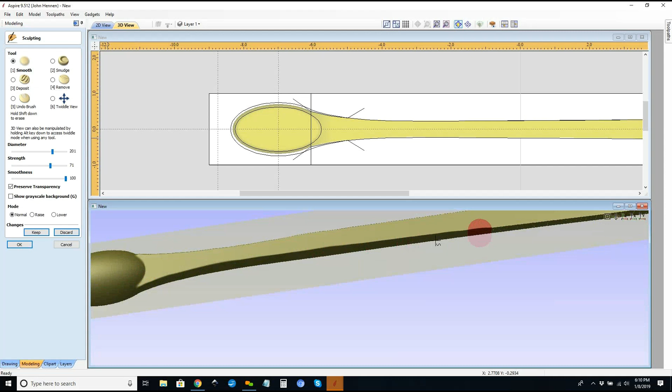All right, so one thing about sculpting that is always good is being right-handed, because your mouse is in your right hand. Second thing is using something other than a touch pad. I've got 2 strikes against me, so my sculpting skills aren't as good as they probably ought to be. If you're going to do a lot of sculpting, and I do recommend if you get into a lot of modeling to learn this tool really well, because it will help you quite a bit in speeding up, especially doing things like feathers and hair and stuff like that.

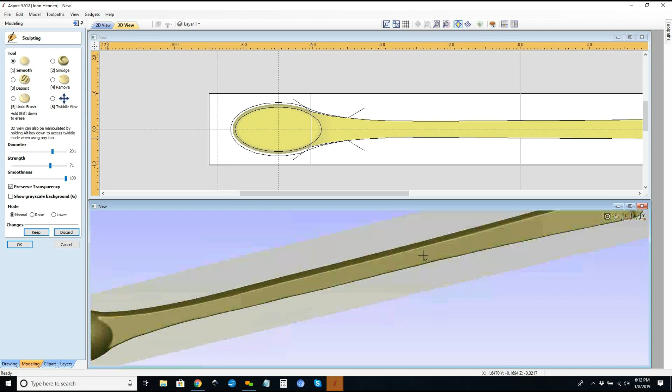Go ahead. Hey, what tool can you use when you had that abrupt transition between the bowl and the handle, that it would push it out, you could push out into the bowl rather than try to remove it? The smudge tool right here. Oh, okay. Yeah, now the smudge tool, now because it's a bowl, and because we've got another side to that, the underneath side, or I guess the top of the spoon, when you smudge, we only have about an eighth of an inch on that. And so we don't want to smudge so much that we push more than an eighth of an inch, or we'll push it up into the bowl of our spoon.

And so that's why I opted not to do it, but it is a good way to do it. And smudge is a great tool. I can show you that in a little bit if you'd like, but it does do a great job for us. All right, so once we're happy with her, we just click on Keep, and that makes her our new model. And then click on OK.

Let's throw a tool path on her, and let's see what we got here. So those pieces right there will be, when we do our cutout, they'll be machined off. But that is going to take just a minute.

Here we go. We're going to go back to this one here. Calculate. Oh yeah, I opened up my vectors, right, to do our 2-rail sweep, so it can no longer machine to vector. So I got to reclose those again. So let's do that, huh?

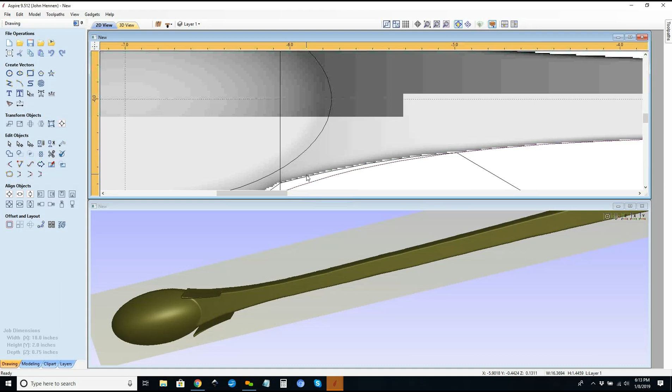Okay, let's take a look at what she gives us here. Preview our visible. Let's see what it does. So it's going to change the shape of that one. Now we need to do some trimming up.

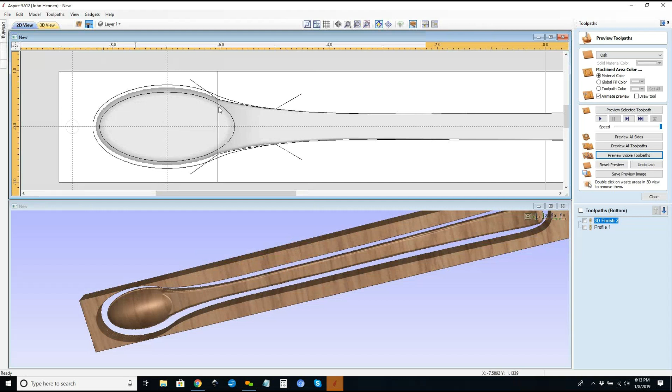So we're going to take these 2 pieces and bring those to the top side. So when we do our cutout, that it gets those 2 out of the way. So we're going to copy to the other side. Go back to our top side and change the shape of our model just slightly. Oop, not that one.

Oh yeah. The blessings of 2-sided machining is that sometimes they allow the vectors on both sides to come into play, which is really kind of silly.

There we go, that goes out. Let's delete that. And let's do this side.

So when you're trimming and you have a vector on both sides of your model, one of the bugs we still haven't quite fixed - you see how I'm trimming, but it's actually sticking because of that vector underneath it. Ooh, we don't want that to happen.

If that does happen to you, sometimes it's easier to just trim out that line, come in here nice and tight, and then clean all those out like that.

So that is going to look more like... I don't like the shape of that on the front side at all, so I think I won't use that one. I think I'll stick with the one I have on the back side.

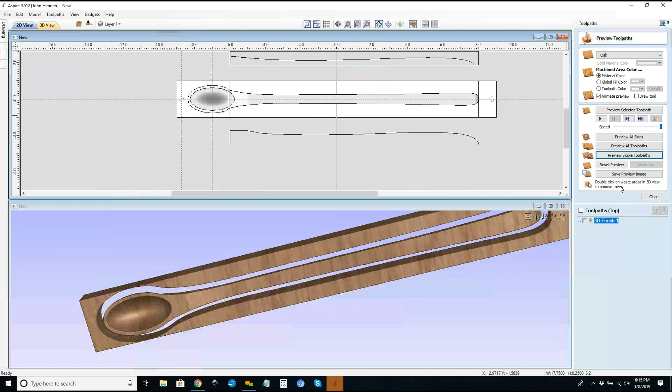Drilling first. When you do this, when you do 2-sided, get a waste board, put it underneath your machine, because we are going to drill through the material and into the board, approximately a quarter of an inch.

I like to go a little bit thicker. It's going to warn you - it's going to say, dude, you're going to drill into your waste board. We're going to say, yep, we don't care. And we're going to say, okay. All right, so we're going to do that first.

So we come up to here, and in our spoon toolpath, if we reset our preview and preview all of these ones, we're going to drill first, this second. Okay, then we're going to take our board.

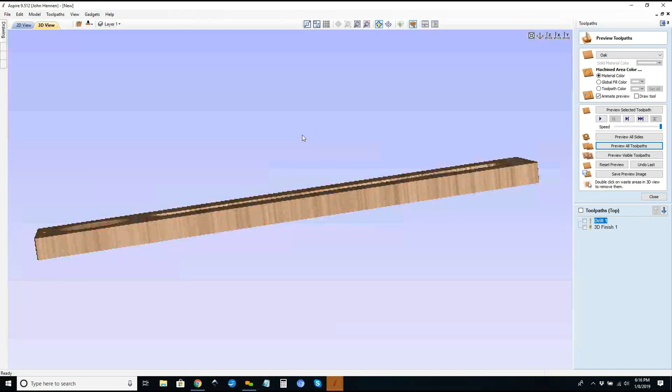We're going to do a flip, a flip on the short side. We're going to flip it over like that. We're going to kick over to this side of the world. Right here, our dowel pins are going to be - we're going to use a quarter inch dowel pin to recenter it. Our 0,0 is still in the middle.

Even if this thing does not look like it fits in the exact same hole, it's probably because this is a little bit larger than 2 inches and you didn't quite cut it perfect, and nobody cares. It's okay not to cut it perfect. We're happy either way.

Then we go in here and we're going to preview our bottom side. Preview all tool paths, and we should get this. And then we should get our cutout. And our cutout's going to be one of those.

Okay, and then at the end of the day, we break it free, we should have our spoon. Our spoon should look like that.

Okay, so a couple of the issues that you just want to make dang sure of that you do is when you flip this thing from top to bottom. So let me reset my preview and preview all sides so we can just look at them.

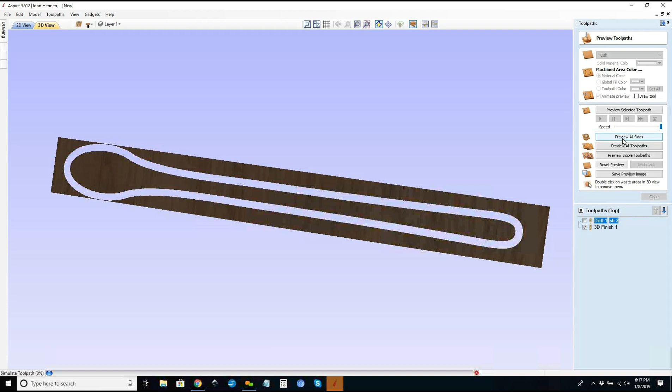When you do this, even if your board is not centered over the top of what you think your X and Y 0 is, do not change your X and Y 0. The reason is these pinholes will tell you where your X and Y 0 are. They are going down your X - they are on the 0, centered on the 0 line of your X.

So if your board happens to be 18 and a quarter or 18 and a half, or you didn't quite find dead center on your board when you were doing your offset, it stays where it is. So if you want to make it out of a little bit wider board, whatever, doesn't matter.

But when you do this, flip it over to the other side, these pins are what are going to hold you to where if it was up a little bit more - say you were off by an eighth of an inch, so it's an eighth of an inch higher up here, right? So when you flip it over, it's now an eighth of an inch lower than it was down here.

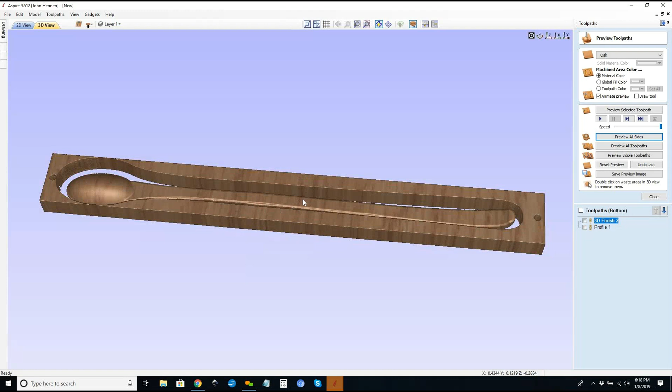If you try to reset your offset to the bottom corner, or reset your offset to where the new middle is because you measured correctly this time, it will now be off, because these two dowel pins are what hold your 0 plane - that's what holds your X0 across your board. You cannot change that. If you do, it will ruin everything that you've just done. So definitely don't do that.

Okay, the last thing you might want to do with this thing, if you're a little nuts, is you're going to go to the top side and you're going to write on it. And we're going to put on here, in a nice font, 'spoon.' Hopefully they already know that, but just in case.

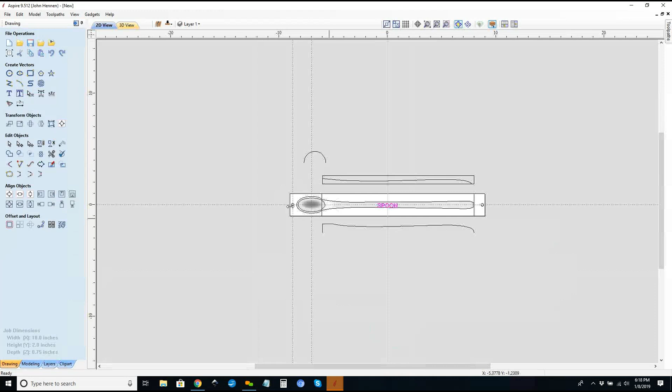And we're going to make this like 3/8 of an inch tall. We're going to put 'spoon' down here. Come here, Mr. Spoon, we're going to put it right here. And we might be right here. Now you might write someone's name there or something else other than spoon.

But if you're going to do that, just do your V-carving just like you normally would. Just project onto the 3D model and calculate it, and now your piece should say spoon on it. So let's flip it over to the front and preview your toolpath, and then you get spoon.

Spoon. So you can do all that and do everything else. But the most important thing is, do not, please, please, please do not adjust your 2 dowel pins. If you do, it will not work. All right?

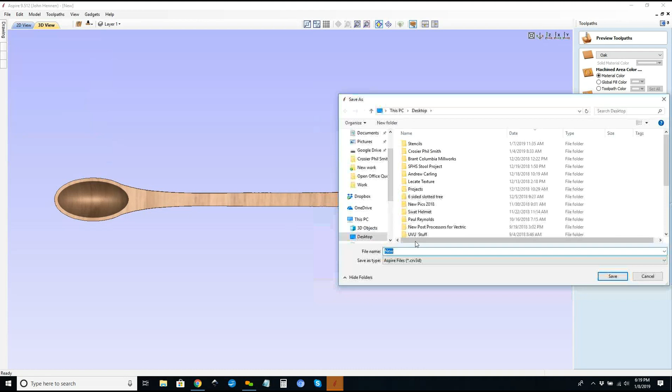All right, we're going to save this thing, and I'll email this to Ted. He can send it to everybody. Call this spoon. All right, any questions about all of this? This is a pretty intense piece, so if there are questions, I'd love to make sure we answer them.

No, thanks a lot, John. It's been very good to see this. It's kind of an intense process, yeah? Yeah, it's quite amazing how involved it is just to make a spoon, but what's really interesting is that you get a lot of concepts out of here to make other things. Yeah, you know, so I hope you can pick up some ideas from it.

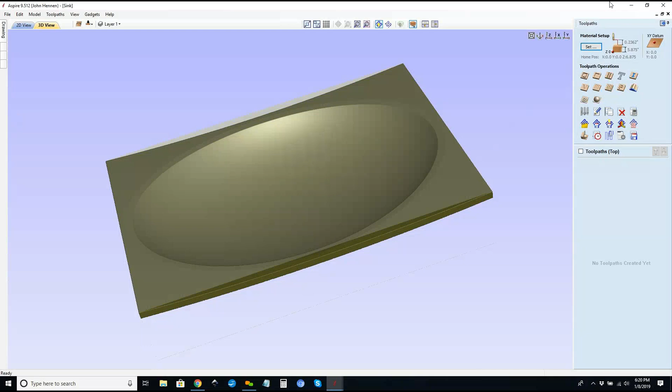I certainly did. I know the whole time I'm watching this, I'm saying to myself, wow, it's amazing how involved it is just to make a spoon. You know, someone says, oh, you make me a spoon, and you say, oh sure, I can do that. And then you say, how am I going to do that? But yeah, it's really nice, and we do have it recorded.